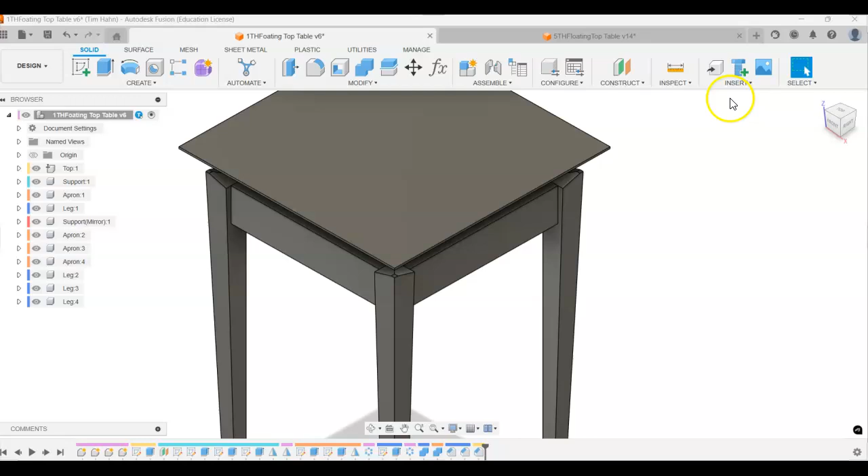All right, we have our table fully designed. It is time to start programming the CNC. So this is the big understanding, and the purpose of this is so that we can program that CNC to what we need.

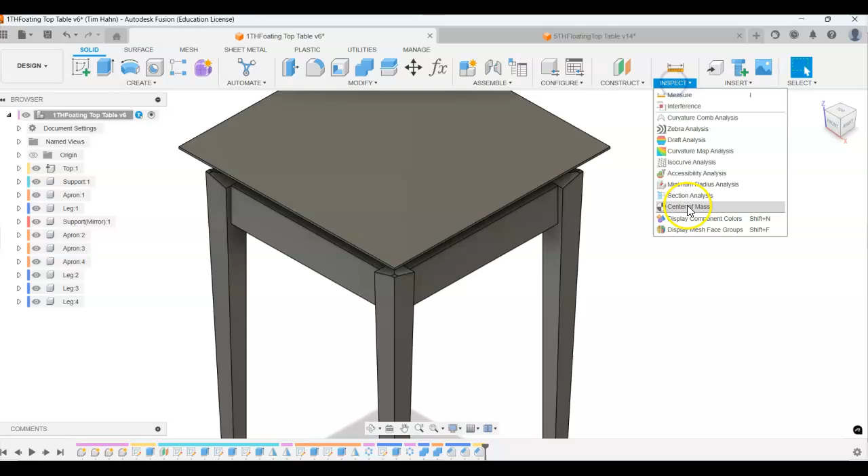So we're going to start out. I'm going to go into Inspect and hit Display Component Colors, just so I can kind of see the different pieces and parts that are going on. I can see everything going here. So I'm going to go up to Design, and I'm going to go down to Manufacture.

Manufacture will get us into the world of programming. Our toolbar, ribbon bar has changed, and we are starting to go. We should see one TH or our initials and then the name of the table here. Unit should say inches. If it doesn't, just hit Change Document Units. Change it from millimeters to inches over here, and then check Set Default and hit OK.

Over here I can see models. Right here is this model. And here's all my information about this model. So I like to keep this open and closing. We're going to be in here a ton.

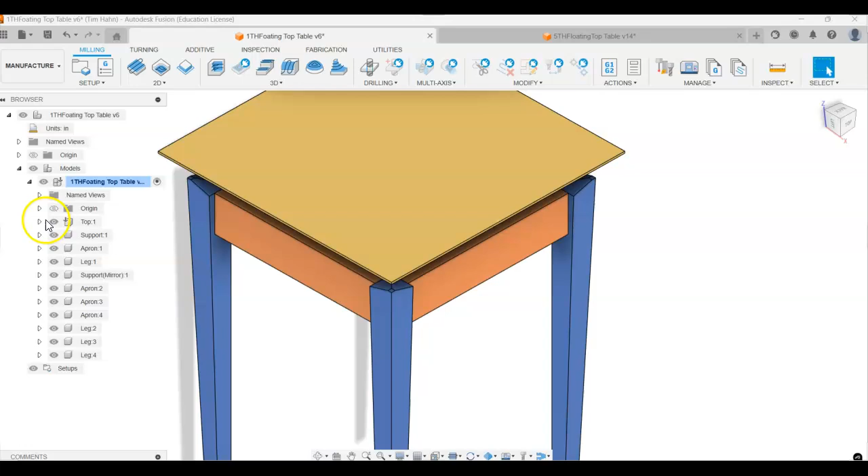Then my next area is setups. So we're going to do a different setup for each piece that we're going to be cutting. So we're going to cut 3 different pieces here. We're not going to cut anything on the top. We're going to cut our apron, we're going to cut the mortise. Our support, we're going to cut the swoop. And our legs, we're going to cut the mortise.

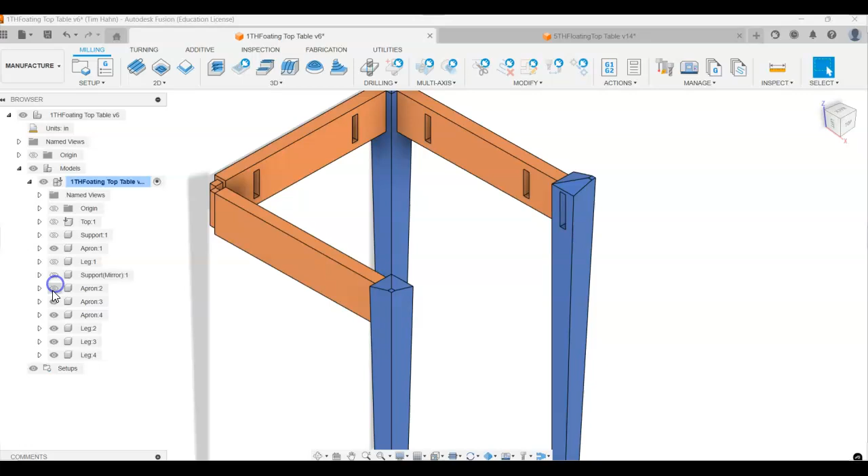So we're going to start out with aprons. So I'm going to turn off the support and everything else. I like to program on these first 4, not on these mirrors and all that kind of stuff. So I got my support up.

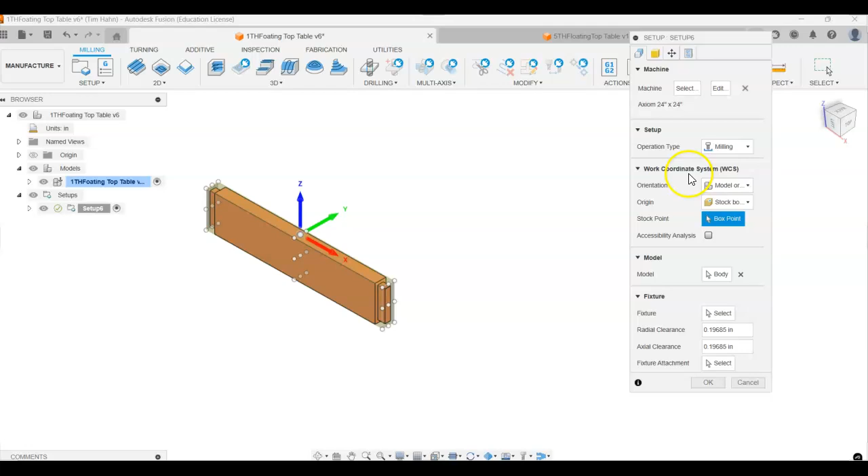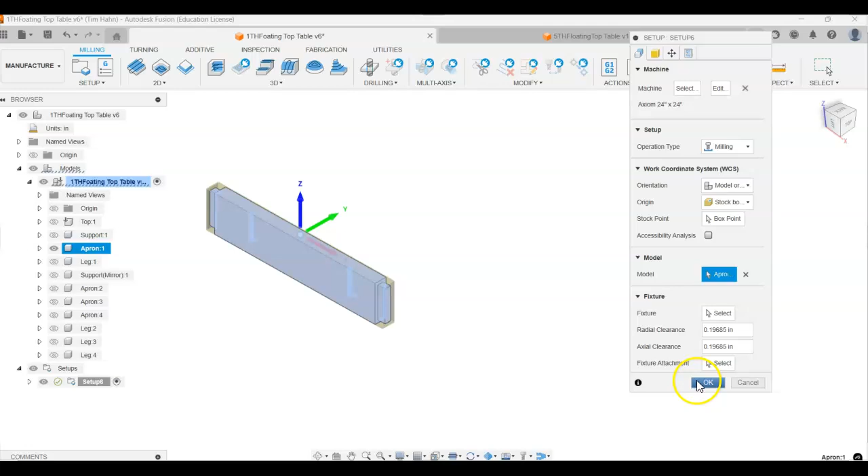Now I'm going to go Setup, New Setup. And in the setup, it's going to ask for my model. I'm going to pick X right there, because it's going to probably pop up that it shows me my whole model, like I'm carving this out of one giant block. I'm going to come over and pick my apron. Then I'm going to go over to, I'm going to finish that out and hit OK.

Slow double click and rename that Setup Apron. I like to keep no spaces, and I like to keep capital letters at the beginning of words so I can read it faster.

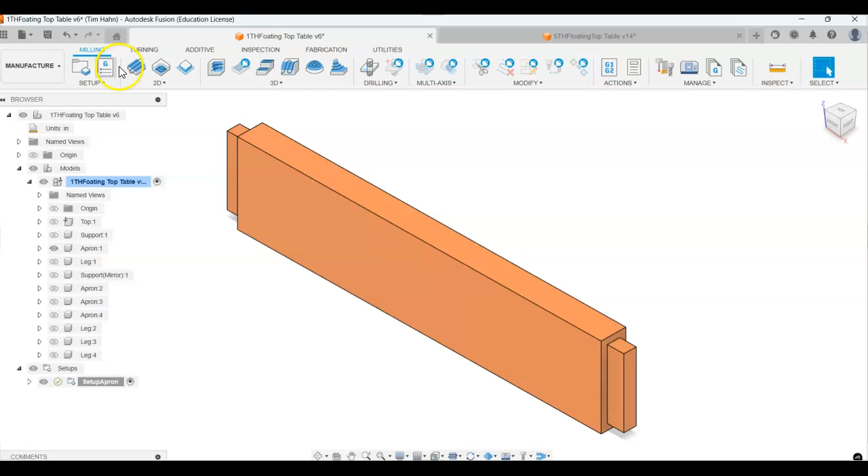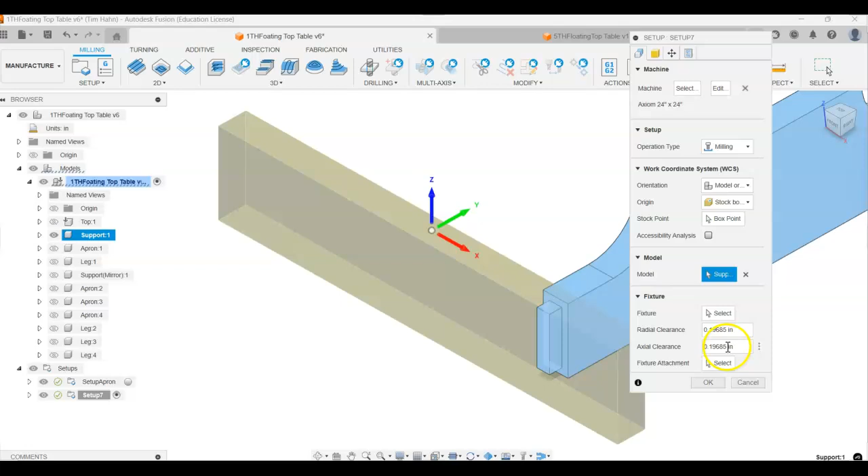Then I'm going to turn off the apron. I'm going to turn on the support and go Setup, New Setup. And you're going to kind of see this apron for a second. We're going to fix that in a little bit. Model right here, I want to hit X. And I'm going to pick the support number 1. There's my model. OK.

Right click and rename, or slow double click. Setup. Support. And that renamed it. I'm going to turn off the support, turn on the leg.

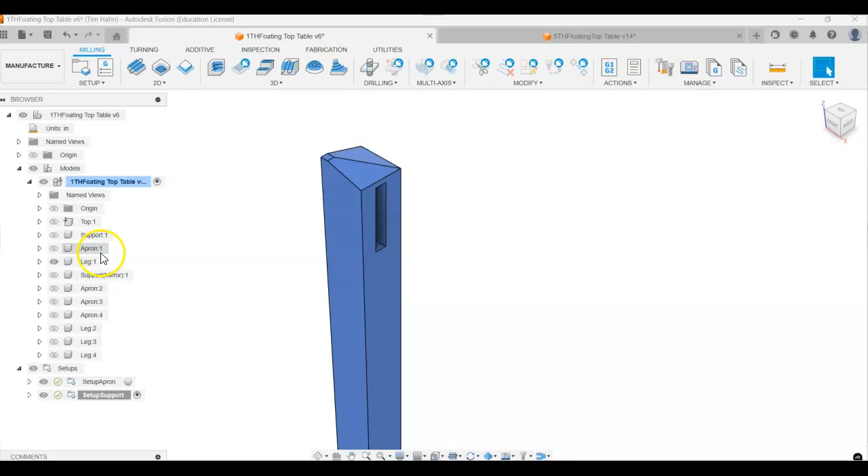Ooh, the leg is way over here. I'm going to go Setup, New Setup. Again, you're going to see the apron kind of come in. We're going to fix that in a minute. I'm going to hit the X on the model. I'm going to pick the leg, hit OK.

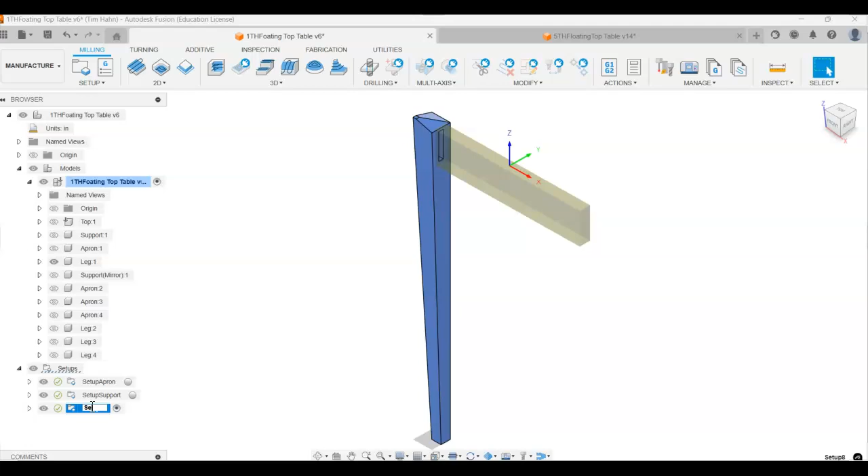Slow double click, Setup, leg. And now I have my 3 setups done, and I am ready to move forward. That's the end of this video. Go ahead, take care of it.